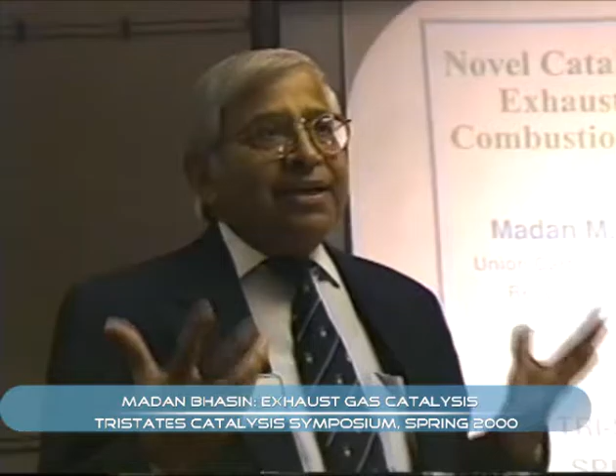What I'm going to share with you is a very interesting, exciting development that was truly out-of-the-box thinking, and indeed represented a paradigm shift. Before I go into any of that, I want to ask a general question.

How many of you have been involved with or have worked in the area of automotive emission control? 1, 2, 3, 4. Okay. And currently still involved? Oh yeah. That's great, so Wolfgang can give me a hard time.

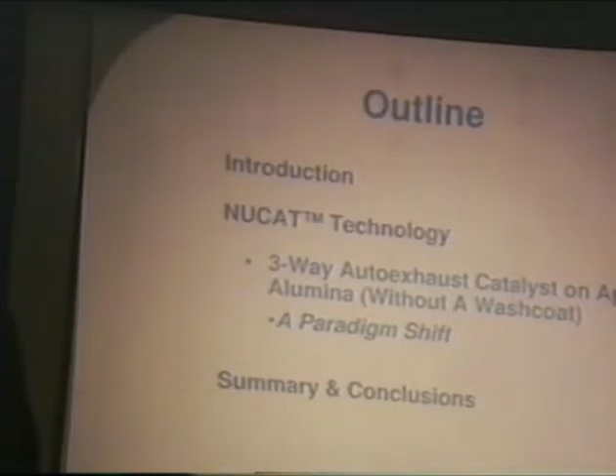What I'm going to then do is give you a little bit more introduction, and that's the reason I was taking that quick survey, to see how much introduction I need to give for this talk. We do have plenty of time, so we'll go at a more relaxed pace.

As you all know, in 1990 the U.S. Congress passed the Clean Air Act, and as a consequence, the automakers, screaming, came along to accept the idea that they should meet the low emission and ultra low emission standards, which of course California was leading the way. I think you're all pretty much aware of the challenging problem they have in Los Angeles and in other areas in California. So that was pretty much the driver behind going to low emission automotive exhaust.

Incidentally, before I go into that, there's a very interesting story that tells you how much emissions do come if you don't have a catalytic converter. A few years ago, Razi probably remembers, we had a building evacuation in our technical center, and we soon found out the evacuation was a result of a carbon monoxide alarm. As you know, we do a lot of low pressure oxo research, so we deal with carbon monoxide all the time, and we have never had any incidents. So when they checked all the oxo laboratories, they couldn't find any carbon monoxide, but they were reading it.

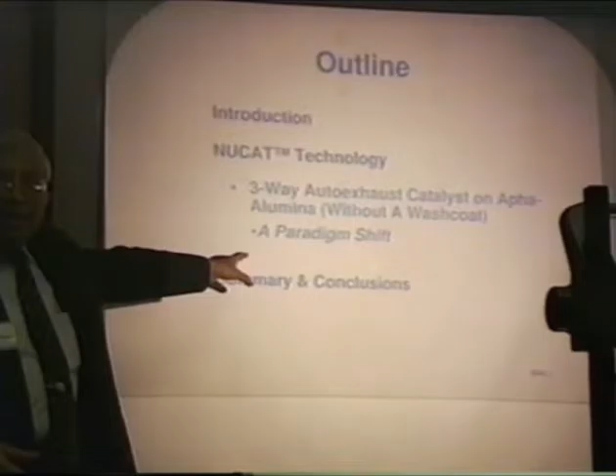But the challenge still remained. So we got back into the lab and did some probing experiments, and we saw some very encouraging things early on, and that's what led to proposing this project at Union Carbide. We are not in the automotive catalyst business, and we developed a technology that I want to share with you today, showing how we were able to not only achieve a paradigm shift through this out-of-the-box thinking - a good experiment in learning - but also achieve performance better than what the automakers had in development, not currently commercialized, but coming up in the pipeline.

Where we are with it today: we have this technology, it's been scaled up and is available, but we did not see as good a strategic fit for Union Carbide to go all the way into the automotive catalyst business. So that's where we are, but we'll show you through these tests. That's the story I want to share with you - real exciting, representing a paradigm shift in emission control catalysis.

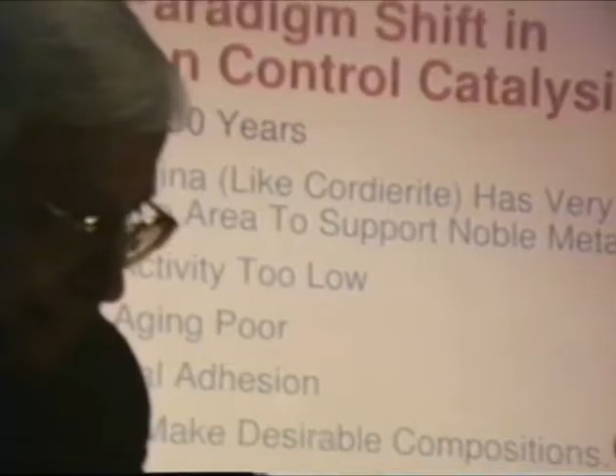Why a paradigm shift?

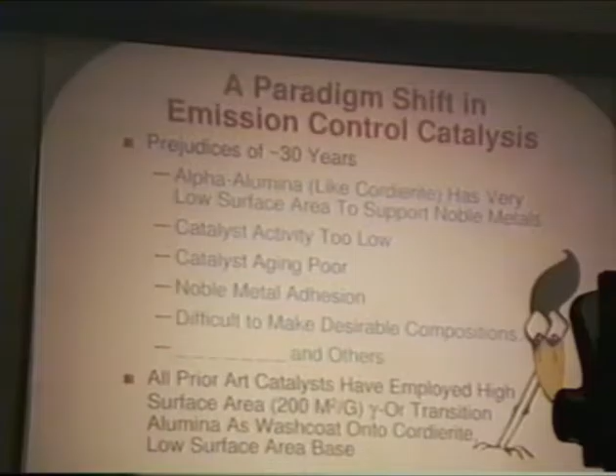Our previous prejudice has been that you need very high surface area. Wrong, you don't need it. Alpha alumina, which is very much like the cordierite base, has very low surface area. But if you can make the catalyst properly, once you have it, it's on a really stable support. The prejudice has been that activity is low, you cannot get enough metal dispersion, and this is where some of our work in the 60s and 70s came to help.

We had worked with alpha alumina in supporting and making high dispersion of palladium and platinum, and that's where that came in handy. Then they say the aging is poor, and because it's already low surface area with higher particle size, you're going to agglomerate. And it's very difficult to make desirable compositions, meaning being able to put the oxidation catalyst and the NOx reduction component together without causing alloy formation or other interaction with the support.

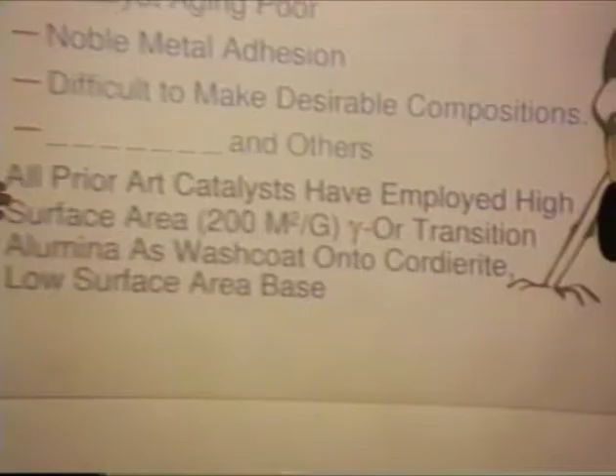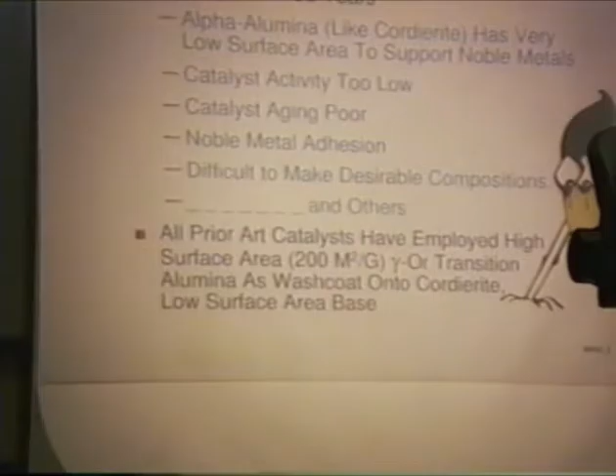You can list a whole bunch of these, and I will not go into that, but I commend the developments that were made because I think they made the challenge even harder by taking a wash coat which is not compatible with cordierite. Cordierite has an exceptional thermal expansion coefficient, very low, way down there. But then they're mixing it with alumina, which has a factor of 10 higher thermal expansion coefficient. And then they got into the challenges of wash coat adhesion, how well it adheres together. Automakers have a test called the wash coat adhesion test, meaning as you cycle through temperature, can you keep it together?

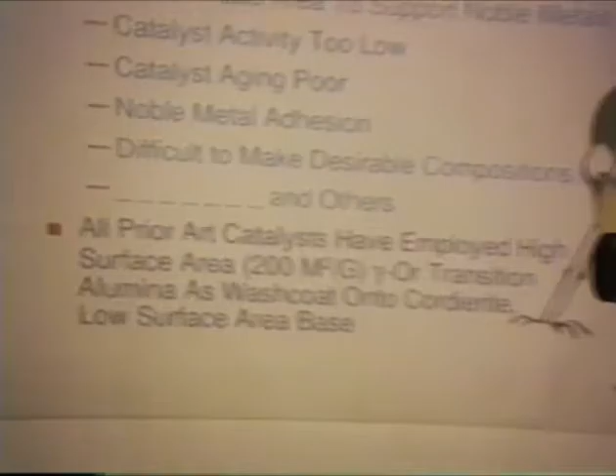Basically, it's a very impressive story. On the other hand, I think they put themselves in a box unnecessarily, more than they had to.

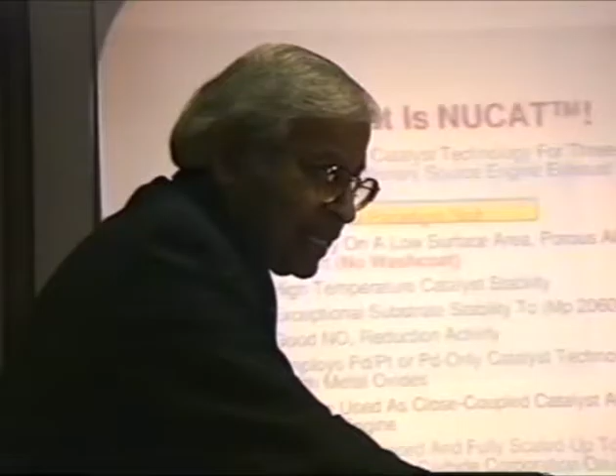Am I going about the right pace? And keeping you all awake? That's the other challenge after lunch. I have the easy job, I just have to stand up here.

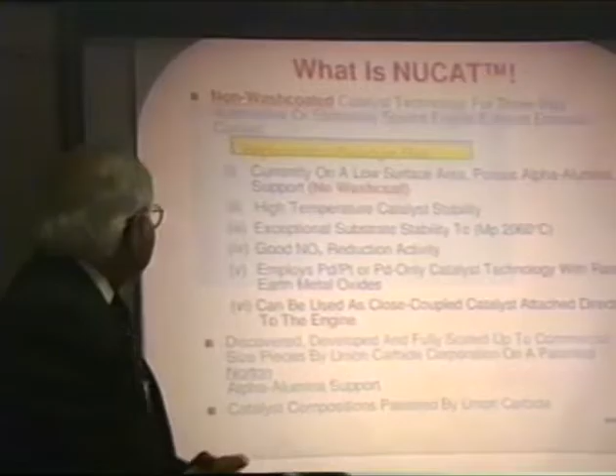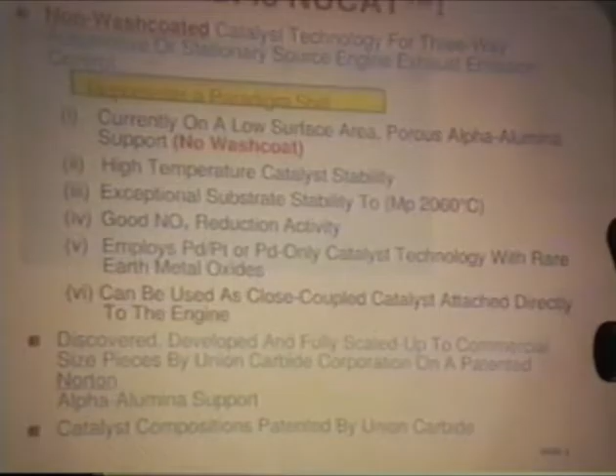So what is NUCAT that Union Carbide developed, collectively working with the ceramic makers, Norton Chemical Process and Products division of Saint Gobain. We worked with them to develop this alpha alumina monolith.

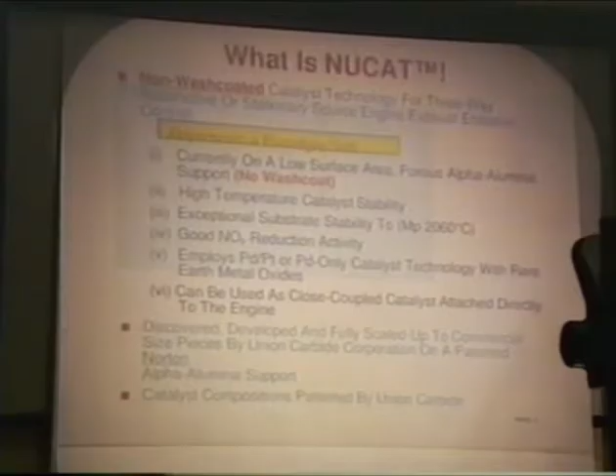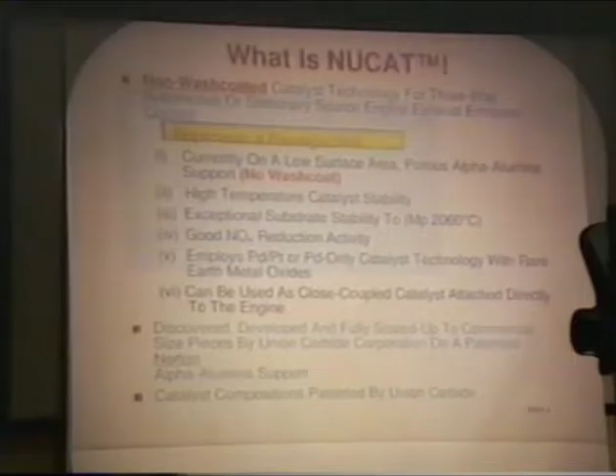It is definitely non-wash coated, and I cannot tell you this enough. Every time I went to our potential customers, all of them would always ask, 'You mean there is no wash coat?' I said, 'Yes.' I had to be nice to all of our potential customers. Even though they asked a second, third time, I said, 'Yes, no wash coat.'

But then how does this metal stay together and not fall off? Well, we've been using silver catalyst on alpha alumina all these years. It's also particulate, and it hangs together for years and years. We haven't had any problem. I can't tell you the theory of that adhesion, but it does stay together.

So we put these catalysts through the paces, through adhesion tests and a whole bunch of other tests. And since these tests are different, when I get to those, I'll go over them a little bit more slowly because they're not the usual tests we do.

So that's the story, and the reason we chose alpha alumina is we've been able to, working with Norton, develop supports that are not only very high purity in alpha alumina with very few impurities, but we know the role of those impurities. We know what they do, and we can not only control them, but put things to our advantage. Well, why use it?

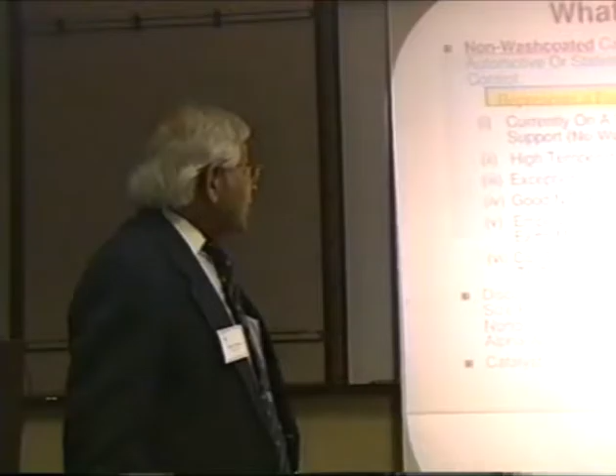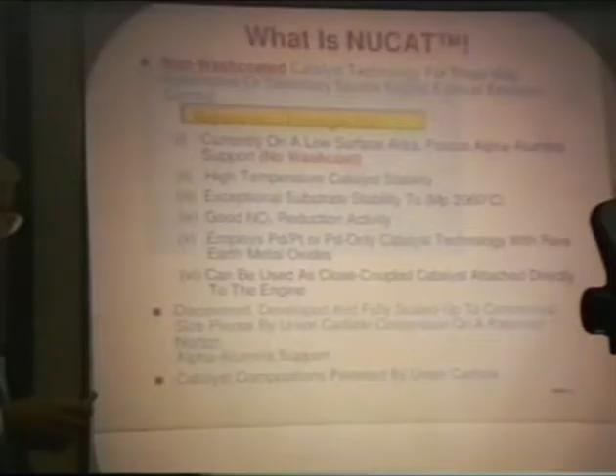Well, it has high temperature stability. When you're putting cordierite on it, the gamma alumina, guess where it's going to go? When you have high temperature cycling, it's going to go downhill to thermodynamically stable alpha alumina. And as it tries to go downhill, the activity decline is almost exponential, because the noble metal is getting trapped as the porous gamma alumina structure collapses and traps the noble metal. So we were looking for that high temperature stability, because you want to be able to put the catalyst very close to the engine. There, instead of 1,000 degrees, temperatures will be up to 1,400 degrees max.

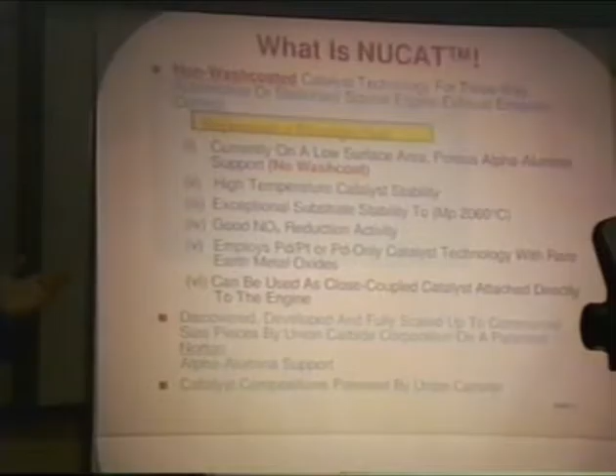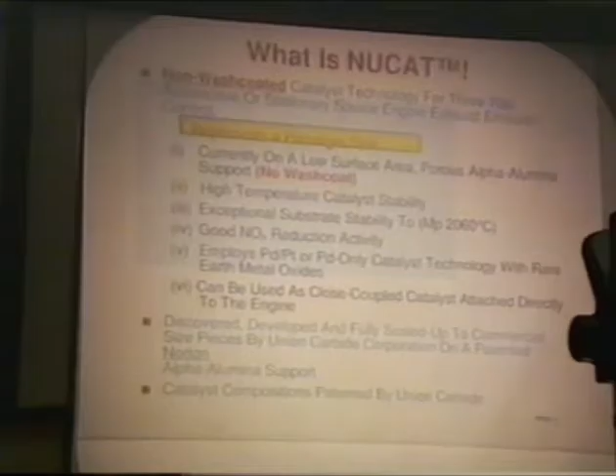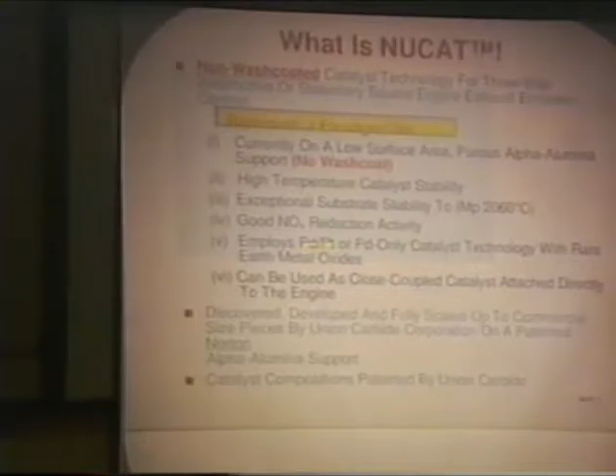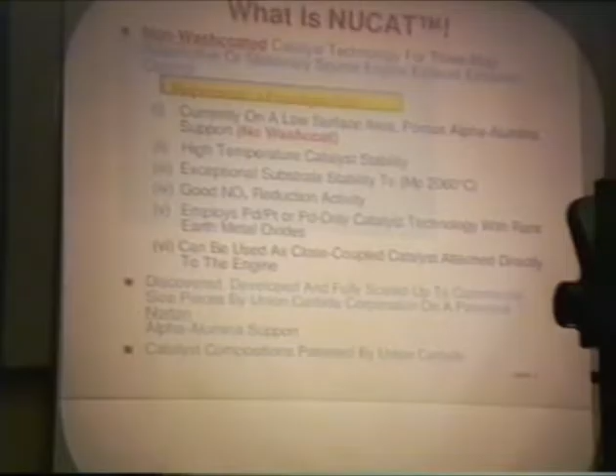And we were able to get very good NOx reduction activity. When we started out, I had no qualms about being able to convert CO and hydrocarbons to CO2, but getting the NOx reduction activity was my biggest worry. We were able to do that through a nice combination of metal dispersion, metal oxides, and their combination made in a special way - using rare earth metal oxides, typically lanthanum and cerium oxides.

So the advantage of this technology is it gives you a catalyst that is very high temperature stable, hence you can keep it close to the engine. Now what are the advantages of keeping it close to the engine? Unlike our catalytic reactors, there is no place to heat the catalyst up, right? The only way you heat it up is to burn some carbon monoxide and hydrocarbons, and that provides the fuel to heat up the catalyst.

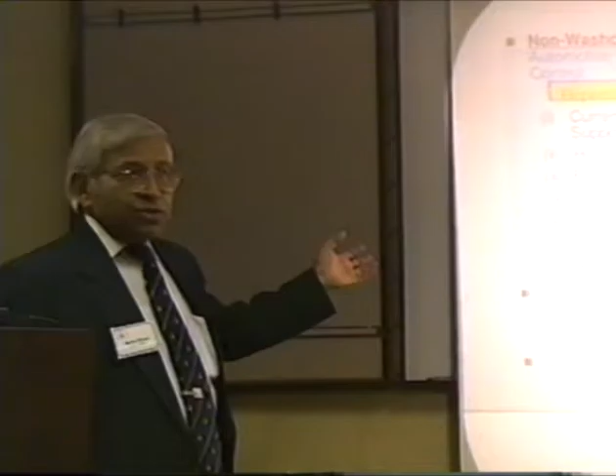If you keep the catalyst about 8 feet away from the main engine through this convoluted exhaust pipe, it's going to take quite a few minutes. In fact, more than half of the typical emissions in the federal test procedure, FTP cycle, occur in the first couple of minutes - you've done enough damage by then. So the advantage of keeping it close is that you're able to heat up the catalyst mass very quickly and start the oxidation process, providing energy which can then be used with another catalyst like we have currently underneath the car.

So this catalyst system is what we developed, and we have composition of matter on both the support as well as Union Carbide patenting the catalyst compositions, namely noble transition metals and noble metal combinations incorporated onto alpha alumina.

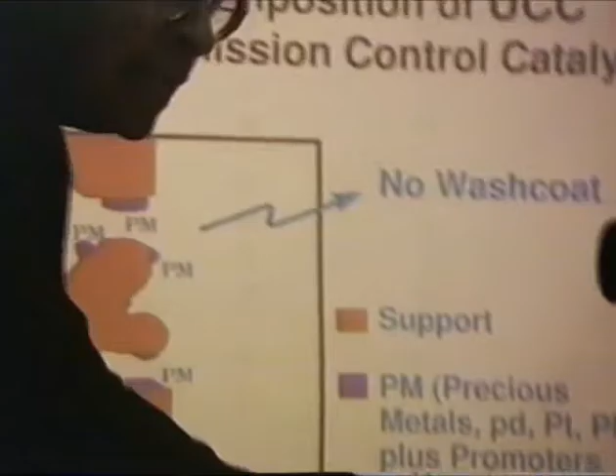Get comfortable. I'm going to ask everybody, please stand up. No, really, take a stretch. No need to. This way, that way. And take your coat off because I think... Yeah, I saw you there, Bill. You didn't fall off yet. Okay, our historian is ready? Yes.

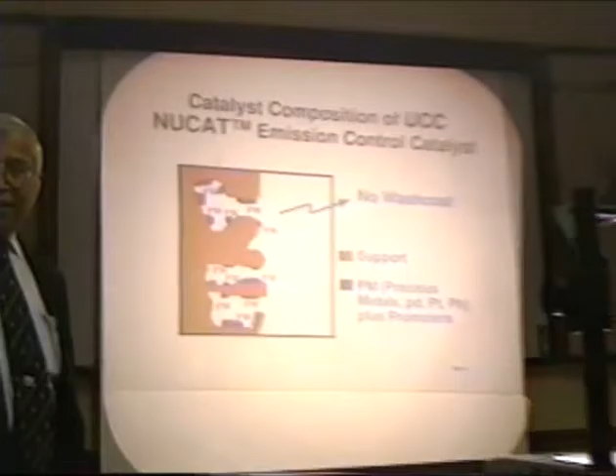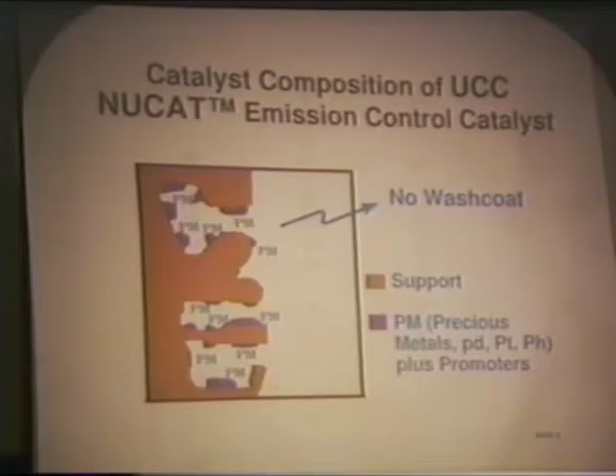Okay, so what is the NUCAT catalyst composition? As I said, it's really very simple, and that simplicity, as you will see, has a lot of other advantages as well that I'll share with you in a minute.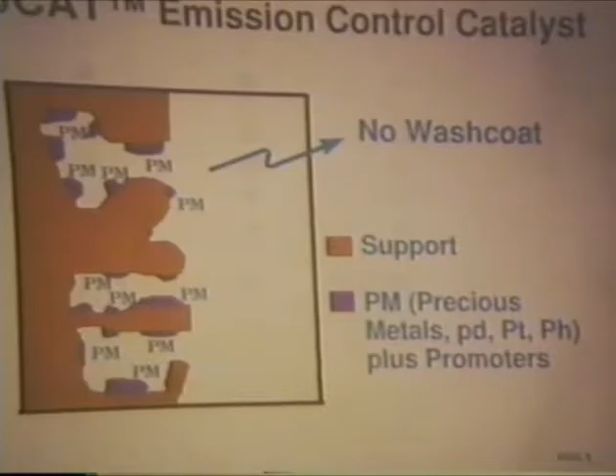Once again, no wash coat. We put the noble metal impregnated onto the porous alpha alumina, and it just goes as a varying particle size of noble metal, combined with promoters, either in one or two impregnations, and we're done. You dry, calcine, and the catalyst is made. So that's our current catalyst.

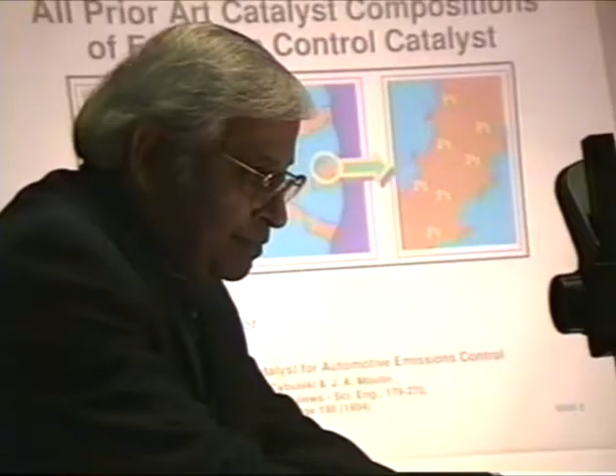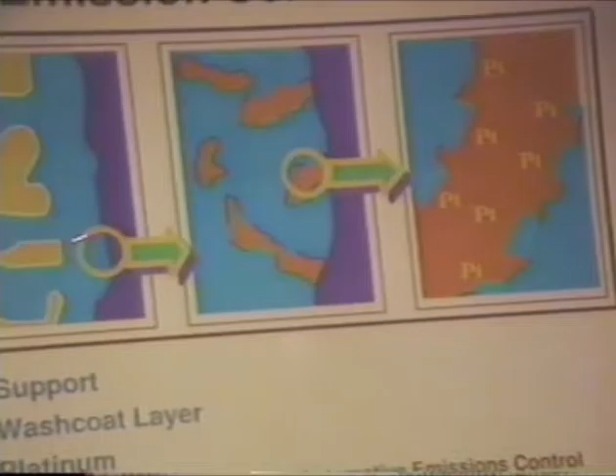The way they've been trying to do it, in a very novel, challenging way, over the years is: if this is your backbone cordierite support, you put the wash coat here, and then in the wash coat you put the noble metal, which has smaller pores.

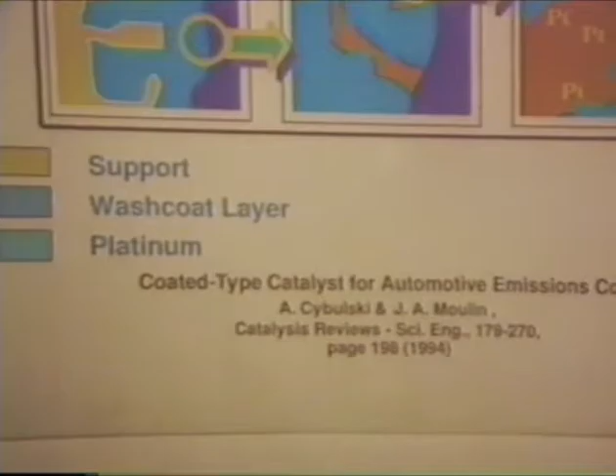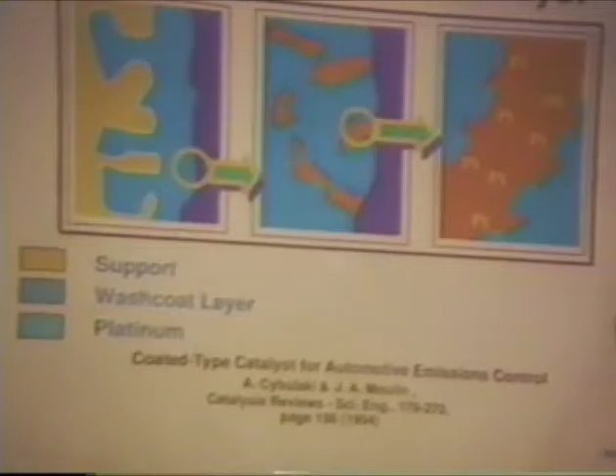And this, by the way, is the other disadvantage. One of the differences why we were able to do it on very low surface area, much lower metal dispersion, is that our effectiveness factor is much higher, because we're talking about micron size pores and they're talking about 100 angstrom pores. That is another big factor. And then, making sure once you have made it, that it remains stable - stability is the key, okay?

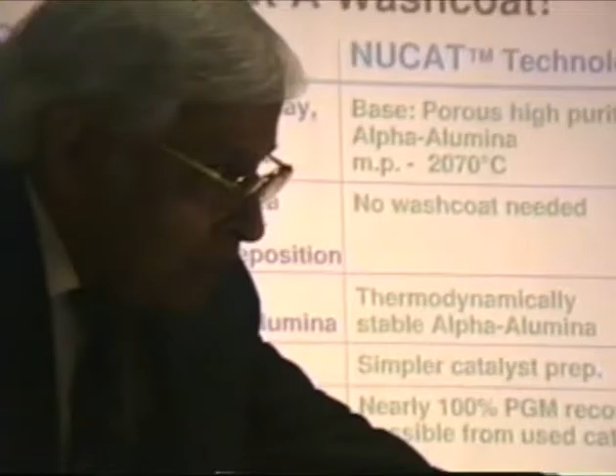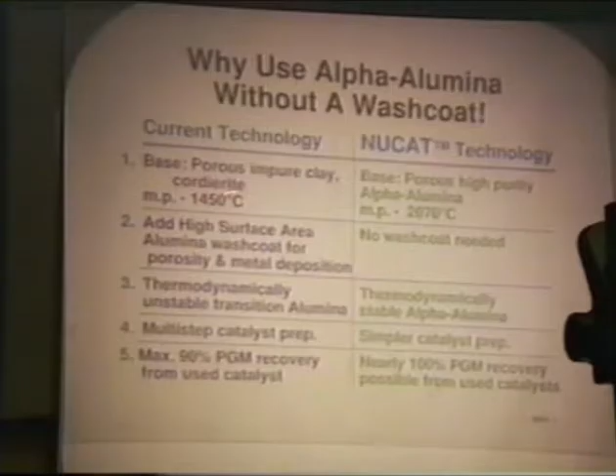I kind of touched on some of these, but let's go systematically. Why use alpha alumina without a wash coat? The base, in case of the current technology, is a cordierite - very good, but its only melting point is 1450. You say, oh gee, that's pretty high. Well, it's not high enough, because when you get excursions in the engine, and if you're going to put it close to the engine, that temperature can easily be exceeded.

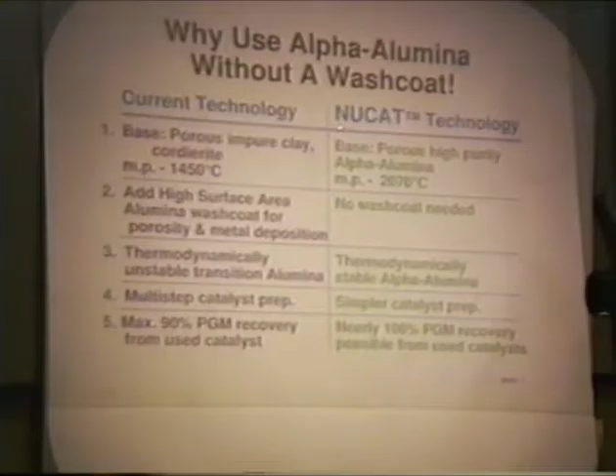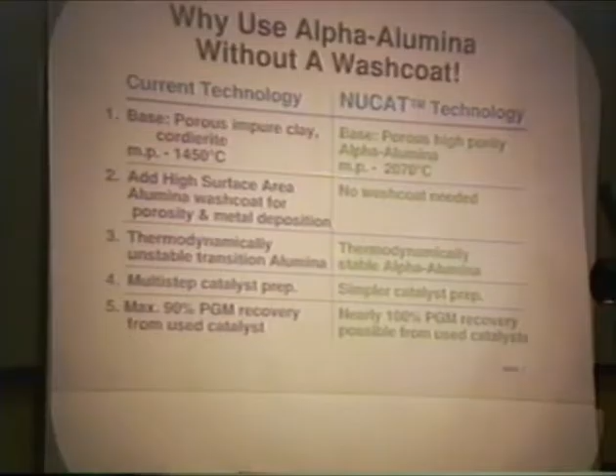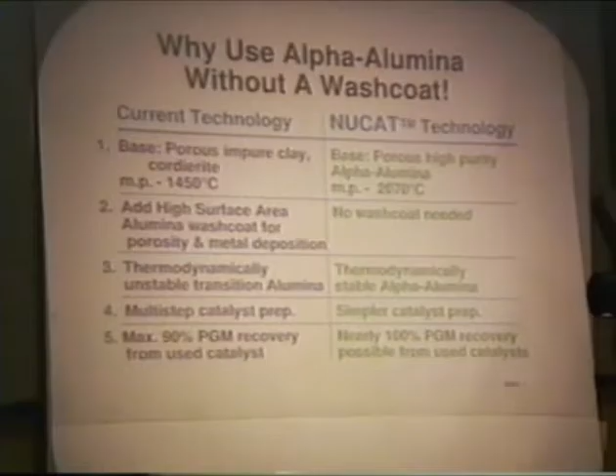In fact, we did some tests at Southwest Institute to simulate an engine misfire, like how it occasionally happens. We showed that the current catalyst totally melted, while alpha alumina based on our technology came smiling through. The difference is about 600 degrees in temperature - the melting point of alpha alumina is very high. By the way, this is dependent on purity, which is why we emphasize fairly high purity alpha alumina. Otherwise, this will not be quite as good.

Then they add high surface area alumina washcoat for porosity and metal deposition, and we don't need any. We do some neat tricks whereby the rare earth oxides and the like provide extra nice catalyst structure within the pores of alpha alumina.

This is inherently unstable, and as you heat it up, it's going to go toward theta and then toward alpha alumina, and we are starting with the most stable phase, and hence that is a big advantage.

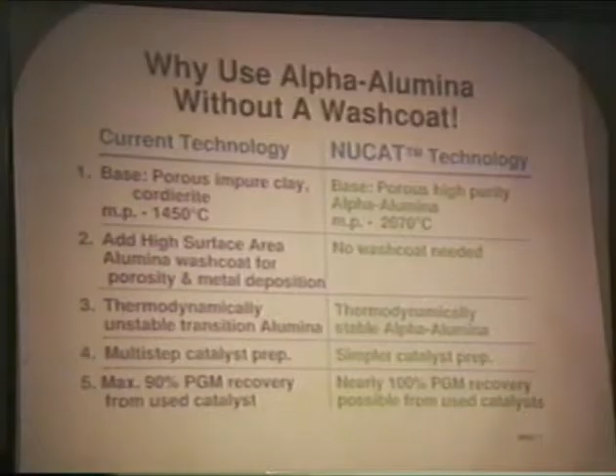Typically, in the current technology, they would be using multiple steps, or if they want to keep rhodium away from palladium platinum, they will have one little part of wash-coated metal made with one metal, and then another one with another. Then you put it together, then you make the whole wash coat. So you can see it's really quite challenging. They do it though, commercially.

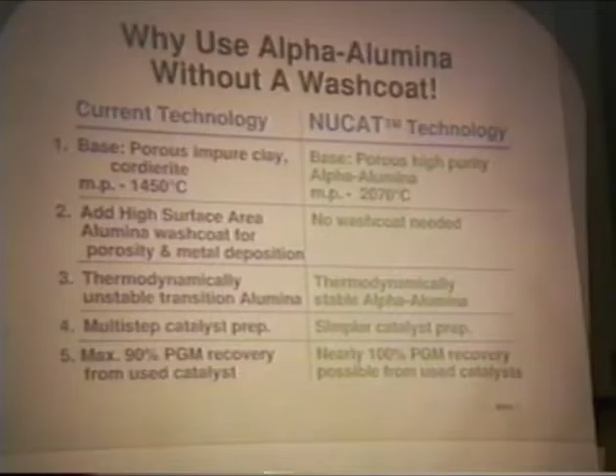Simpler catalyst preparation. And this last one, cannot overemphasize at all, is that typically because of the low metal loading you have in these typical catalysts, the noble metal recovery is only 90%. You're talking about expensive metal, palladium, platinum, and rhodium. And we're talking near 100% because there is no place for alpha alumina to go or to trap anything. So with a simple extraction process, we were able to typically get 99+% recovery. And that's a big advantage, especially when you're talking about very large volume of inventory of these expensive metals.

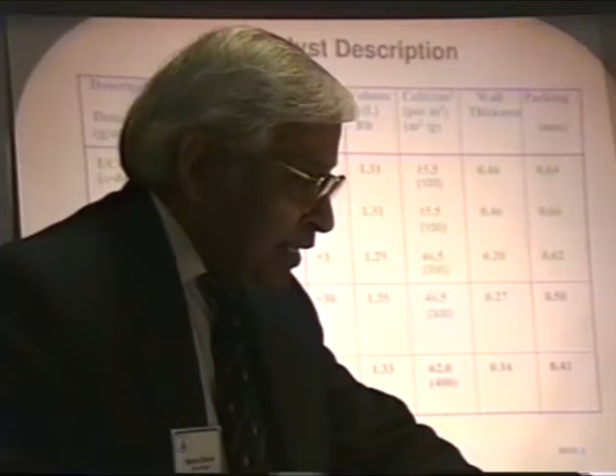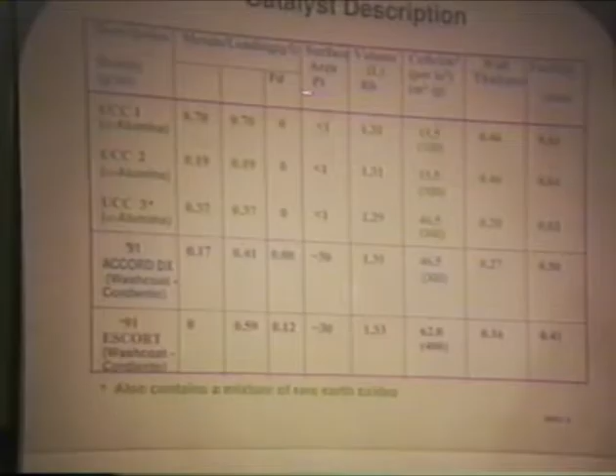The catalyst that we're going to be talking about, there are three compositions that I'm going to share with you as examples. By the way, this column somehow, this row somehow moved. This is palladium, that's platinum, that's rhodium, and this is surface area, and not there. So, something happened there.

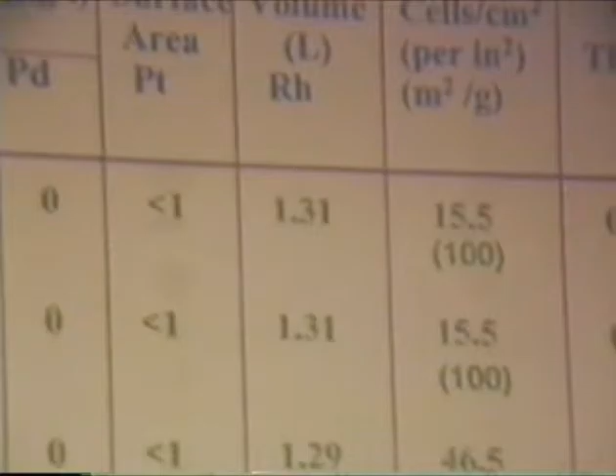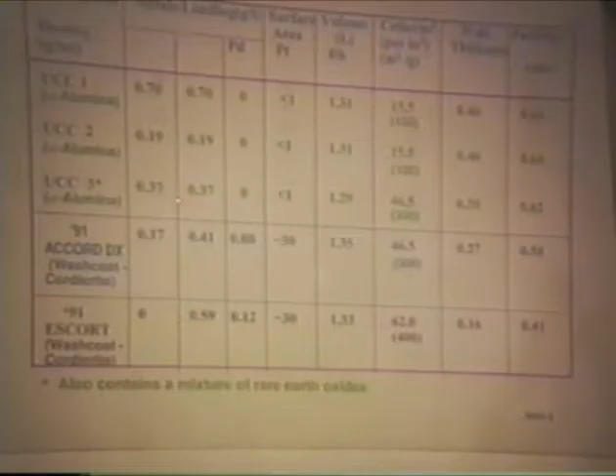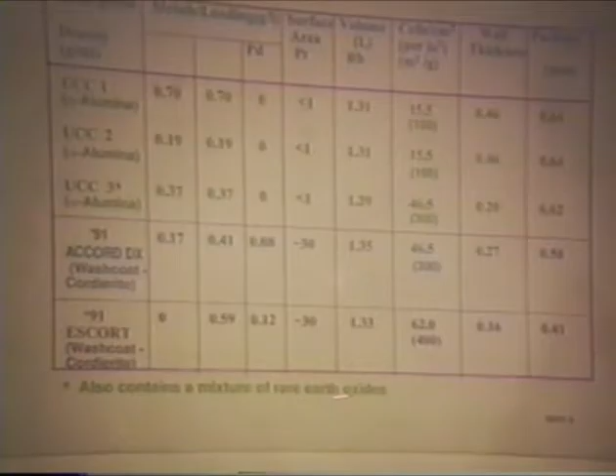And so the palladium, platinum, we initially started with high loading, thinking we need a lot more. We found out we do not need that much. So the next compositions were quite a bit lower, and then we settled to somewhere in between metal loading of palladium and platinum. And this composition also has rare earth oxide. The first two does not. And you'll see the rare earth oxides do provide the extra conversion of NOx to nitrogen, and that's due to a palladium-platinum interaction with the rare earth oxide. So just remember, number 3 has rare earth oxide, number 1 and 2 are simple palladium-platinum catalysts.

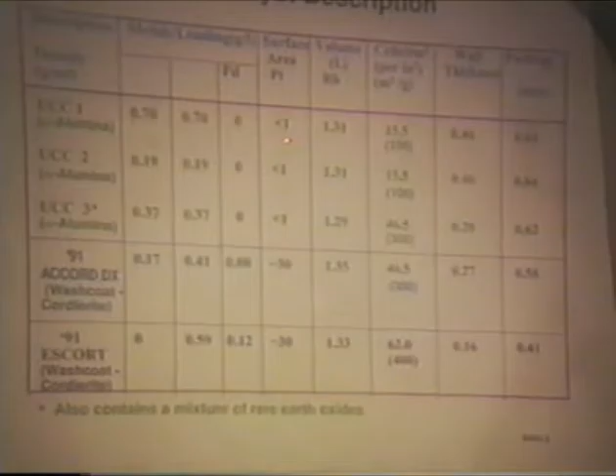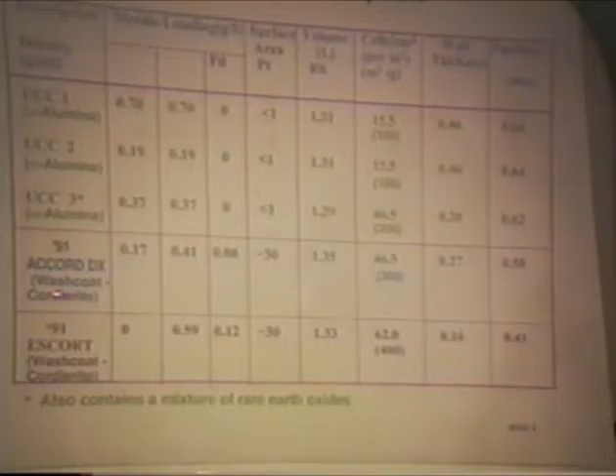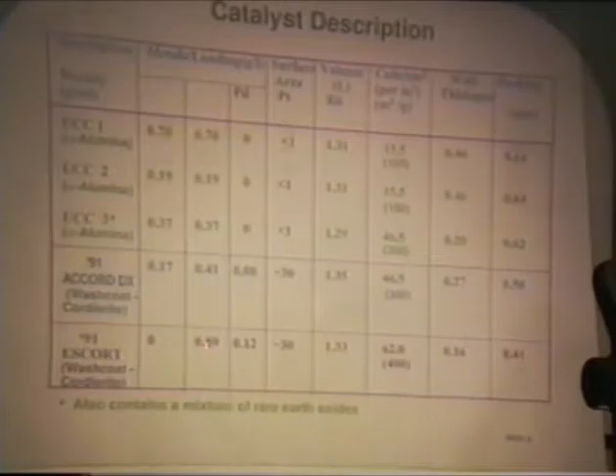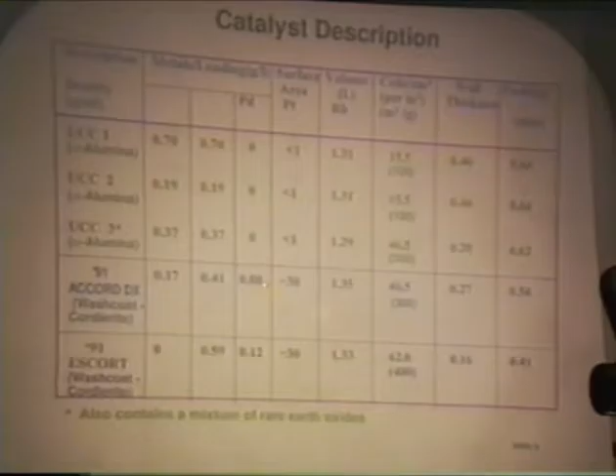The surface area is all typically less than 1, and for the commercial catalyst, one was Honda Accord, of course, wash-coated cordierite, and an Escort. Now, the metals in Escort does not have any palladium, but has platinum, rhodium. Surface areas after their 200 square meter wash coat of 10 to 15% would be expected to be in this range. And this Accord also has palladium, platinum, and rhodium, all 3 components, to achieve the 3-way conversion performance.

And in terms of volume, we kept it very close to make sure that we're comparing on the same basis, because there's no point in having activity if I'm going to wind up requiring a bigger can underneath the car. It doesn't do any good. So they're all about 1.3 liter in volume.

And the cell density, this has to do with how effectively the gas is flowing. We started with low cell density, 100, but soon matched very close to what's commercially being used, 300 cell. It's in both units of per square centimeter and per square inch.

And wall thickness, again, was high initially. That's a consequence of having low cell density. And then we reached a wall thickness also very close to what's commercially being used. Important part of this is that this has to do with how well your frontal area is and how well your catalysts are going to do in terms of pressure drop, which is very, very important.

In terms of packing density, again, these units are mixed up, but this is grams per milliliter. It's typically all the same, and when you go to 400 cell per square inch, then your density is lower because you don't have as much mass.